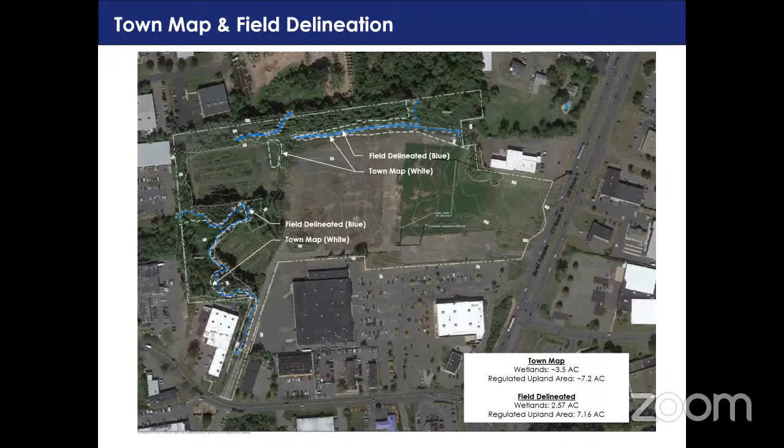Are we gonna take a roll? Excuse me, are we gonna take a roll, Ms. Gibbons? Yes. All right, please proceed. Commissioner Ancona? Here. Commissioner Bashan? Yes. It's a yes or no. Back to Mr. Ancona. Commissioner Ancona, yes or no? I didn't hear you. Well, I'm sorry, yes. Commissioner Bashan? Yes. Commissioner Casasanta? Yes. Commissioner Conway? Yes. Commissioner Paskowitz? Yes. Chairman Sadoo? Yes. Commissioner Wagner? Yes. 7 yes. Okay, thank you. You're welcome.

So moving on to public hearing B, application number 2021-11 for construction activities in the inland wetland and watercourse regulated area at 3333 Berlin Turnpike. Applicant HJG-PC Newington Investor LLC, owner the Rocky Road Realty Company, agent contact BL Companies. I will ask the applicant if they have another presentation for the public. Yes, we do, Mr. Chairman. Please proceed. Thank you very much.

Again, for the record, my name is Chris Smith, and I appear before the commission representing the applicant concerning this application, which is the subject of the second public hearing. And this application involves a request for permission to conduct certain regulated activities associated with a mixed-use residential and commercial development of the subject real property known as 3333 Berlin Turnpike.

And Mr. Chairman, if I may, I'll just quickly go through. We have a similar intro, obviously, that we covered with the prior public hearing, but the public hearings are separate unless we incorporate certain segments. So I'll just briefly go through some of the same information that we did with the prior public hearing. Please proceed. So again, the applicant comprises two different entities. The first is Grossman Development Group. And on behalf of the Grossman Development Group, we have with us this evening Mr. Howard Grossman, who is the president and managing principal.

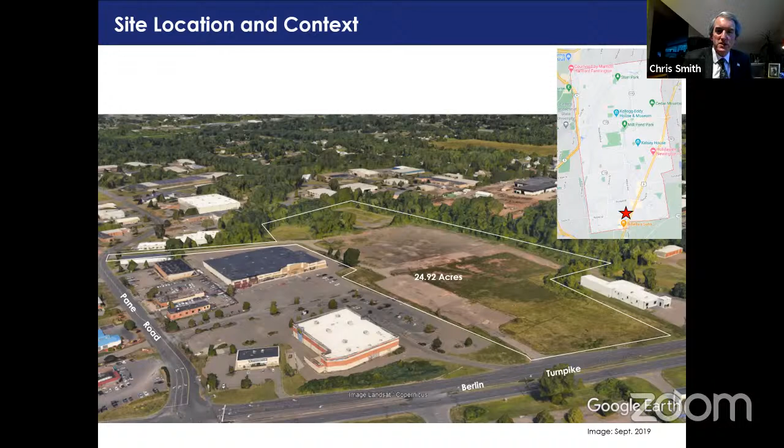The subject property, again, is 3333 Berlin Turnpike. You can see the locational map on this slide. There's a locational map in the top right-hand corner with the site located in the bottom southerly side of the locational map. On the easterly side of the property, we have the Berlin Turnpike, and in the southerly side, we do have access from Pane Road to the subject property.

Now, if I can have the next slide, Mr. Chairman, if we may, Mr. Davison can walk through the same presentation, or if within your discretion in the commission, if you wanted to incorporate that portion from the prior public hearing, just dealing with the wetlands identification and description, we can have that incorporated. So I will waive that at this time. Please proceed to your next slide. So you would like Mr. Davison just to provide a quick summary? Please. Okay, thank you, Mr. Chairman. So with your permission, I'll turn the presentation over to Mr. Davison, and he'll provide a summary of his description of the various wetland resources and watercourse resources associated with the property.

And then, just to provide you with an overview, we'll turn the presentation over to representatives from the BL companies who will walk through the specific site development relative to the regulated activities that are being requested to be approved this evening as part of this application. As the commission's well aware, the commission's not being asked to approve the actual site development. That's the subject of a separate hearing involving special permits with your Planning and Zoning Commission. But what's involved here this evening are the regulated activities associated with that site development. So having said that, I'll turn it over to Mr. Davison, and then we'll hear from representatives of the BL company. Thank you, Mr. Chairman. Thank you.

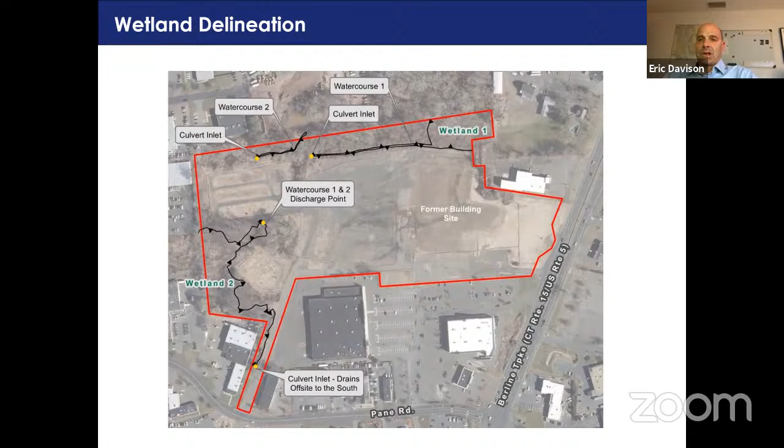I don't know, Mr. Chairman, just having gone through some of this before, I don't want to be too brief, but I don't want to waste too much of your time. So I don't know if you want me to go through. If I'm okay, we've seen this. I think I'm willing to proceed beyond, I'll go with your earlier testimony, and I'm willing to step through these slides fairly briskly. Obviously, these are photos. Perhaps I could jump ahead to the photos, and this would answer, I'm sorry, I don't remember the commissioner's name, but it was a great question. Just trying to relate the photos to where there are wetland activities. I can do that quickly if you want me to. Please.

Let me just scroll back to the, okay. So essentially all of the wetland impact areas are in the watercourses. The only wetland impacts are associated with just modifying the stormwater outlets. So the bulk of the impacts are really associated with the watercourses. And this is a major location here. This photo shows watercourse 1. This is at this point west of wetland 1.

And as you can see, it's sort of tough to tell, but for those of you that went out on the site, it was probably pretty clear to you that this is just, again, a big constructed drainage ditch. You can see the riprap on the far slope, the riprap on the base of the channel, and the riprap in the foreground on the slope closest to where I'm taking the photo. There's a lot of vegetation that's grown in, but you can see it's just a constructed channel. You can see there's no flow in it at this point.

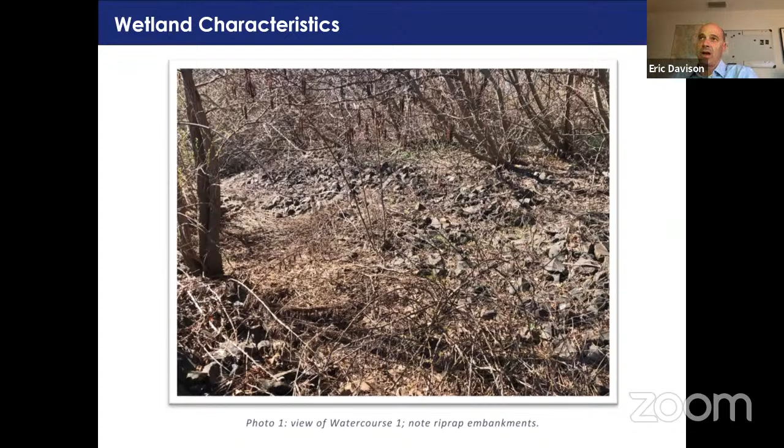If you want to go to... But just to be clear, yeah. Mr. Davison, however, the conduit will be beneath the ground. Obviously, we're going to cover it over, but the actual hydrology, if there's a very heavy storm, the water will be flowing underneath the parking lot over to the west. Correct. And meeting up with that other watercourse that's off the property.

Yeah, I was going to bring that up too, that when he said filled in, that might have been confusing. It's going to be buried, but it's still going to be there. Yes. And I'll let the engineer, let me just give you the orientation, but obviously the engineers can describe the flow conveyance features and stormwater features. But yes, sorry, poor choice of words. Yes, it will be piped. The watercourse will then be piped as opposed to open.

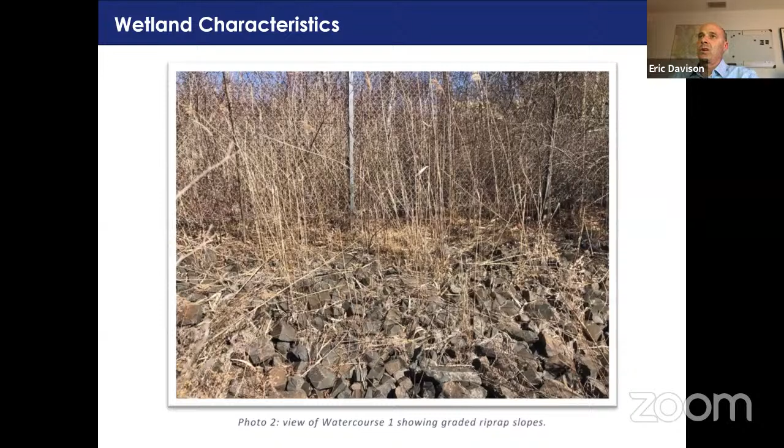This photo is just showing the origin of watercourse 1 at the southern base of wetland 1. This is about where the limits of disturbance begin. This is just at the southern edge of wetland 1, right where the watercourse starts. That riprap that you see in the photo, that is the far slope or the northern slope of watercourse 1. And then if you guys want to flip ahead to watercourse 2, keep going. You keep going.

Okay, so this is watercourse 2. This is another section that will be impacted. This is the watercourse again that flows from the offsite detention pond. It flows onto the site where it elbows and turns to the west. At that point, that's where the parking is going to end. So the parking will cover this watercourse, and again, it will be piped.

This watercourse is already piped, so it'll basically just be extending the piping, well, I'll let the engineers weigh in, but it's basically just a short extension of the piping to accommodate the northern end of what's going to be parking. But this is the other channel that will be filled in. Again, this is not a wetland, it's simply just a watercourse. It's just a flow conveyance feature. It's got riprap in it, it's got manipulated earth, it's mostly invasive species. There's no real significance or function to it other than just carrying flow into a pipe.

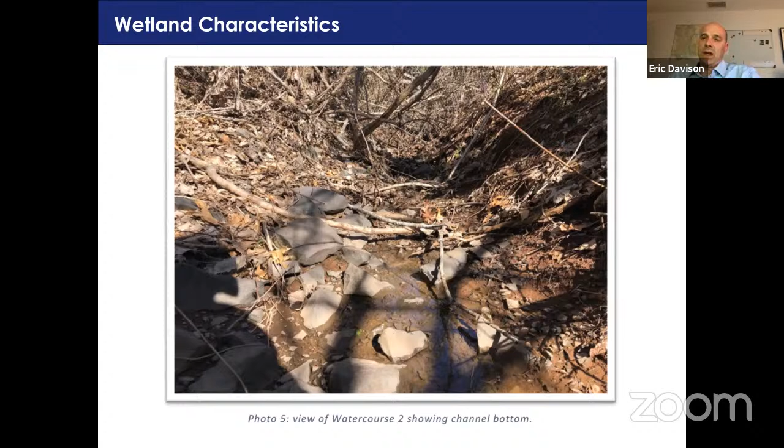So those are the photos that show the two areas that will have direct impact. The other photos that I showed of this wetland here, wetland 2, these are all areas that are outside of any direct impact. So hopefully that answers the question the other commissioner had asked about photos relative to impact areas. Those are the only areas that will be directly affected. Yes, it did answer my question. Thank you very much. You're welcome.

I have a question. That open area on the left-hand side, I assume that's the area where there's going to be the stormwater management area on the plan? Correct. That's an open field now. That was one of the Eversource equipment staging areas and training areas for their arborists when I originally flagged the site. So that's an open area that's already been disturbed and manipulated. There's some gravel and some grass, and it's an open field.

I'm sorry, Mr. Chairman, didn't mean to interrupt you. It looks like there's some kind of a swale or a little detention basin there now. Is that correct? No, those are just mowed trails, like mowed lines in there. I think what you're seeing is some fencing around the outside. I stood on the road there and looked in, and it looked like it was a depressed area. So I thought it was intentional, but maybe it's just the appearance of it. Yeah, there's no stormwater feature there now. Okay.

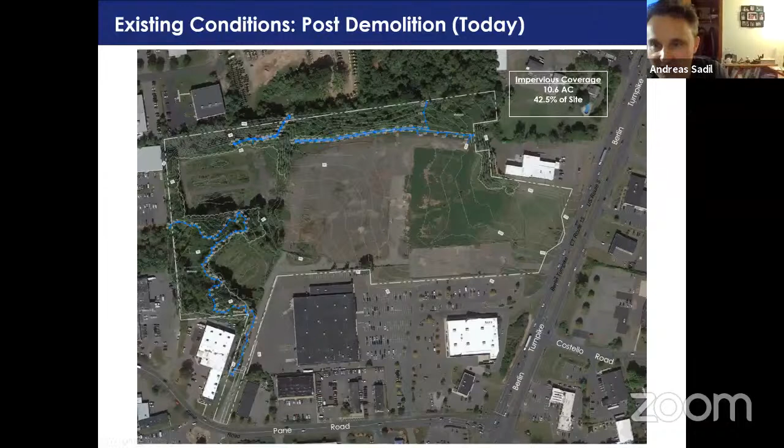Thank you, Mr. Chairman. For the record, Dennis Goderre with BL Companies, Senior Project Manager. I'm a licensed landscape architect here in the state of Connecticut. I'm also a planner certified by the American Institute of Certified Planners.

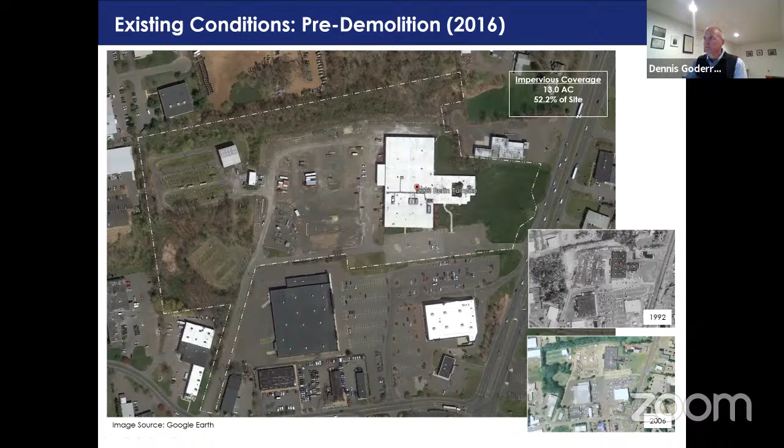At the time, just over half of the property was considered basically impervious. A fair amount was also not just paved or building, but was gravel, which is very comparable to asphalt pavement, especially after it has been compacted with vehicle movements. After demolition, just below half, 42%, remains today as nearly impervious with the buildings removed. So as you are aware, it is a highly disturbed site.

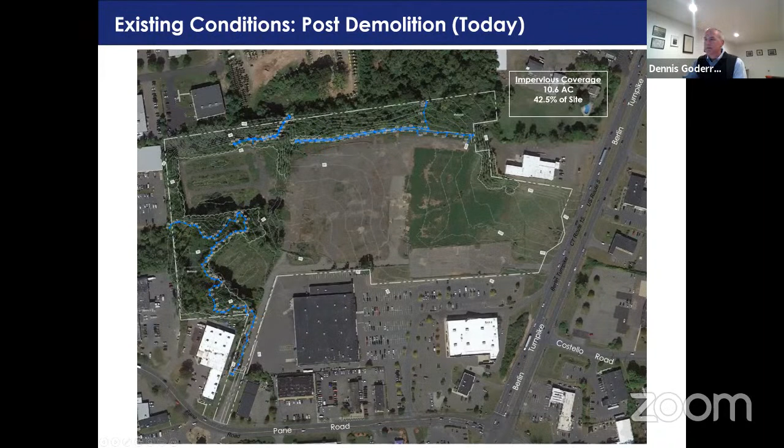I'm going to just provide a brief overview of the project itself, and then I'll turn it over to Ms. Carlson to talk in more detail about the stormwater management and other technical aspects. As was previously mentioned by Attorney Smith, the site is just about 25 acres. It is proposed to be subdivided to accommodate a residential development on the western half of the property and a commercial development on the eastern side. So it's roughly 13 acres and 11 acres to accommodate the two developments.

It's 269 residential units and just under 80,000 square feet of commercial space, a mix of different types of retail and commercial, with a supermarket as the anchor. Stormwater management is located in this location, which is above grade. There's some below grade subsurface, which Ms. Carlson will talk about in a moment. And supporting the development is parking to meet the requirements of the zoning. I know that zoning isn't your regulatory area, but it has an impact on the overall site layout.

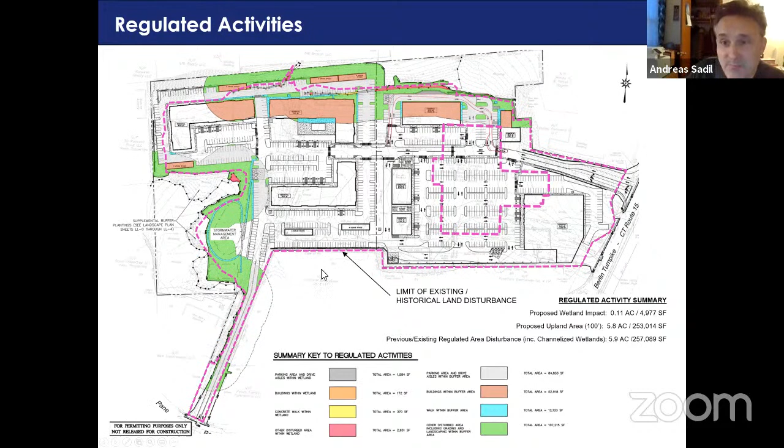Mr. Sadil? I have questions. A few. Yes. So as far as the site itself, are the wetlands going to be impacted by refuse receptacles? I mean, when you have a housing area, there will be people who have to dispose of their day-to-day trash; is that going to impact the wetland? Also, I'm concerned about snow removal. Is that stormwater area going to be vulnerable when you have to push the snow out of the way? And how has that been addressed?

The wetlands will in no way be impacted by those activities once the site is functional. Yes, the refuse area. So this is one refuse location that services the residential. There's another refuse location here, and then over here that services the retail and commercial. There is an operations and management plan that we have submitted that would require routine reviews and litter removal and pickup and inspections to ensure that the areas of refuse are enclosed and maintained. If any debris does in fact get blown in or find its way into the wetlands, it would be picked up as well.

Snow removal, there are areas such as this triangular location here. Some of these larger areas would also have locations for snow storage. Some of the runoff would find its way into the stormwater system, which would then have some level of treatment, which Ms. Carlson can speak about momentarily. Okay.

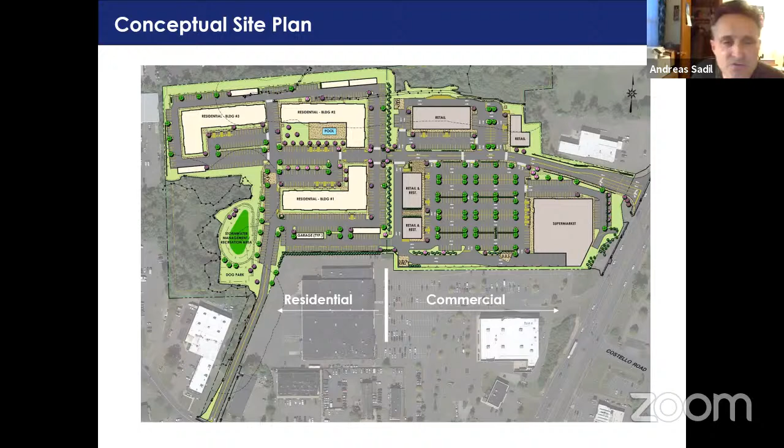I did have a question about the plantings adjacent to the wetlands. Who can tell us what plantings you're showing in your model there, hopefully no invasives of any kind? No, you read my mind. That was one of the slides I was getting ready to present. We are proposing, to the best of our ability, to remove any of the invasives that are there. We certainly would like to achieve removal of all of them. But then we would look to enhance the buffer area outside of the wetlands with new plantings. It hasn't been established really how many.

It would be more case by case, or based on field conditions as the development gets finalized, but native species such as red maples, cedar, winterberry, and dogwood, to name a few. They would be native. We would not by any imagination be proposing any types of invasive species to be introduced. That would not be in our proposal.

Thank you. If I may, Mr. Chairman. Commissioner Bashant. And to answer the question I believe the chairman raised about those most mature trees that we saw the pictures of, they will not be disturbed, I gather, by looking at this image here? Or will they be disturbed and then replanted with the trees that you're showing? In this location, the only area of wetlands that would be disturbed is right up in here, which is already disturbed from riprap and discharge from the existing stormwater conduits that discharge at this point. All of the other mature vegetation within the wetlands would not be disturbed. So there's no activity in there at all, basically? No. Okay, thank you.

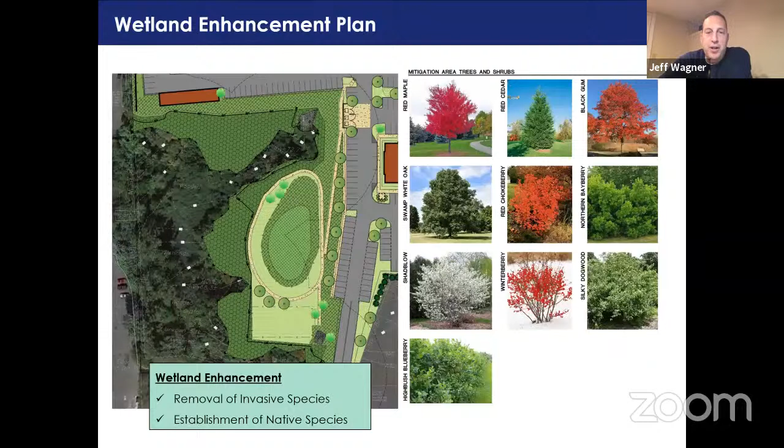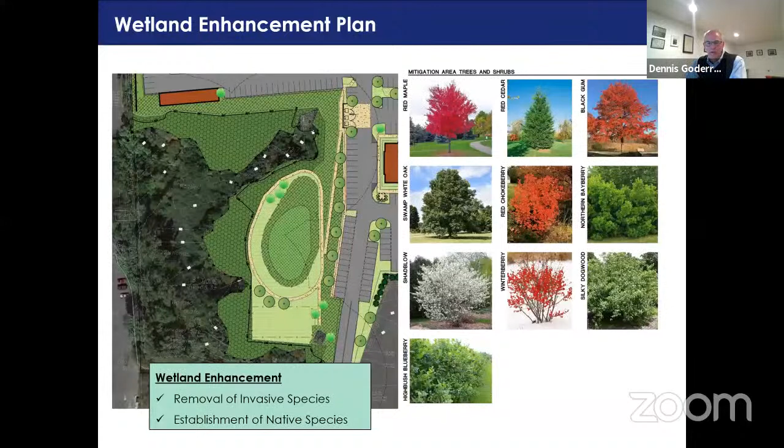Commissioner Wagner, I have a question. Commissioner Wagner. Are the parking lots going to have storm drains, and where's that stormwater going to run off to? That is a great segue to the next part of our presentation. If you wouldn't mind, we could certainly continue, and Ms. Carlson can give an overview of our stormwater management plan. Beautiful. Thank you.

Good evening. My name is Michelle Carlson. I'm a licensed professional engineer in the state of Connecticut. I'm the director of land development at BL Companies, and I'll walk you through the stormwater system. First of all, the existing system has no water quality treatment. There are no controls in place. So the system that we're proposing is going to implement controls to treat water quality, flow, and volume.

The system's designed in conformance with the 2004 Connecticut DEEP Stormwater Manual and the 2000 Town of Newington Drainage Manual, and we've reduced flows through the 1, 2, 5, 10, 25, 50, and 100-year storms. I should say the rate of runoff. There's a reduction in the rate of runoff at each of our discharge points over what's going there now, and it's designed in accordance with all of the standards.

What we're gonna do is there's the different colors here, so you can see where we're collecting stormwater and where it's going. So we'll start from the east side by the Berlin Turnpike in the navy blue. The navy blue piping is collecting roof water from that first commercial building out front and the catch basins in the parking lot. And the catch basins, we're proposing deep sump catch basins with hoods. So the hoods will help trap any of the floatables that might get into the system.

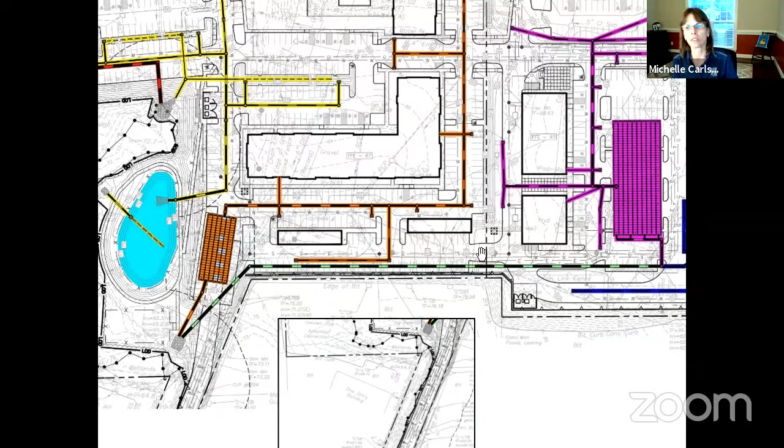No. Which I would imagine if there's going to be a problem, that would be a good problem. But too much of a good thing can be bad. Yeah, no, we are not increasing the rate of the flow. So there's nothing that's gonna come surging down into these outlets and cause erosion. We are decreasing the rate.

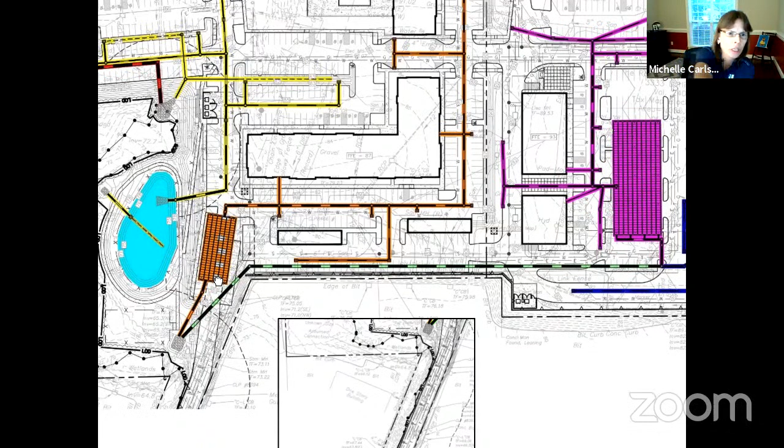Michelle, maybe you could speak to existing drainage on that area near the building, what was there and where it went, if you know. Sure, it basically went, Eric, to the middle of the pond. You can't see on the blue here. Yeah, it would go to there, and then there was another part, Dennis, that went right almost into the middle of the pond. Let me pull up the drawing, it might be easier. There's an 8-inch pipe that discharges over in this location.

Correct. That was my memory, is they did have a system down that existing driveway you can see on the aerial that went that way. So I think that might answer Commissioner Casasanta's questions, because the water did flow. They did have an existing drainage system.

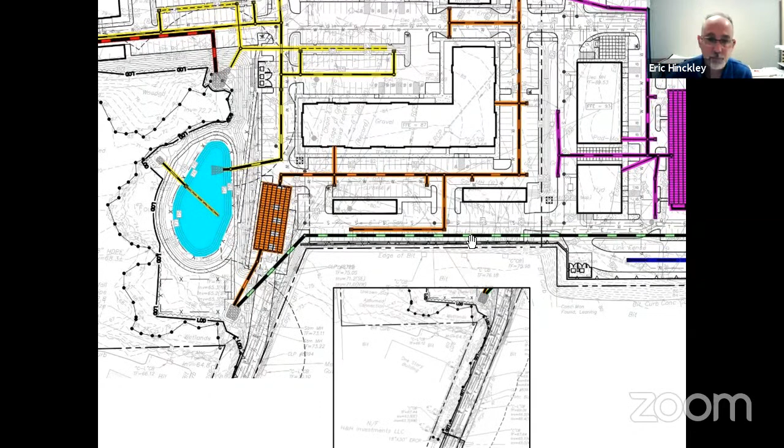Yeah, and for the record, again, Dennis Godere, BL Companies, even though the building had been demolished, all of the infrastructure is still in place. There's drainage structures here and conduit that's piping all the runoff currently discharging into this point or over to this point over here. Thank you.

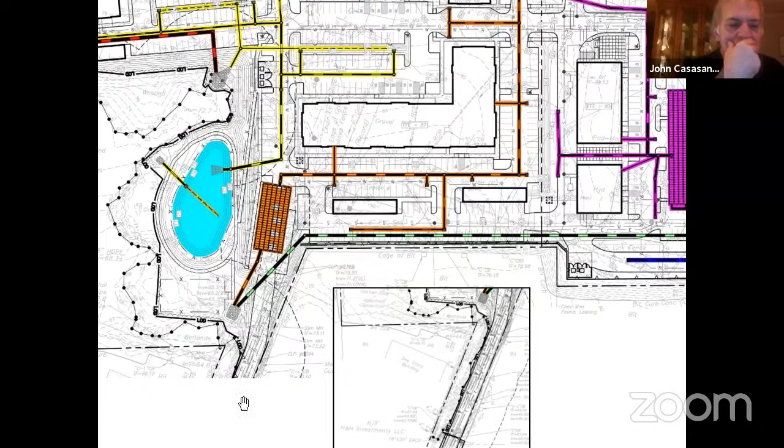So that stormwater management area, is there gonna be plantings in there, or is this gonna be an open pond where the ducks are gonna be? If I'm trying to envision this area, is that the way that area is gonna look when we're done? It's to drain dry. The intent is that we want it to drain dry. It's not designed to be a permanent pond. All right, are you gonna have some plantings in there? Obviously, with this wind blowing, something's gonna catch in there at some point, right? Especially invasives. Dennis, did you want to go over the plantings in the bottom there?

Yeah, as of now, there's a conservation seed mix that we had been proposing. That's part of what's in the buffer plantings. We can certainly enhance that with some of the native species that would be tolerant of wet and dry conditions. Yeah, it's not going to be a mud hole if that's what you're concerned about. No, it won't. That won't happen. Okay. But right, that would not be a welcoming view for the residential.

Okay. So relative to the wetland and the water that goes into the wetland hydrology, what type of maintenance is involved yearly, or what's planned? Obviously things go awry, things get clogged or sediment, and how does that work out so that the hydrology isn't impeded?

Well, we have the O&M that was submitted as part of the documents, and there'll be annual maintenance of the hydrodynamic separators. In the first year, you usually check the structures twice as much as you will in the subsequent years to get a handle on how much sediment is going in there. But the hydrodynamic separators, it's annual maintenance, regular sweeping as needed, trash pickup, quarterly checking of the catch basin sumps. And so there will be a regular maintenance program for the site.

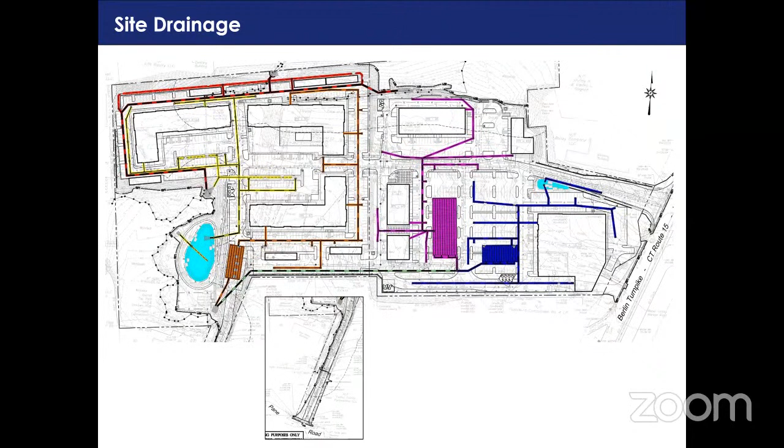Any other questions from commissioners? I don't see any hands up. See nothing from any of the attendees. Any questions for Ms. Conway? Commissioner Ancona, any comments? I have nothing. Thank you. All right, one last check from the public. Nothing that I see. All right, and at this time, I will thank the applicants and the presenters.

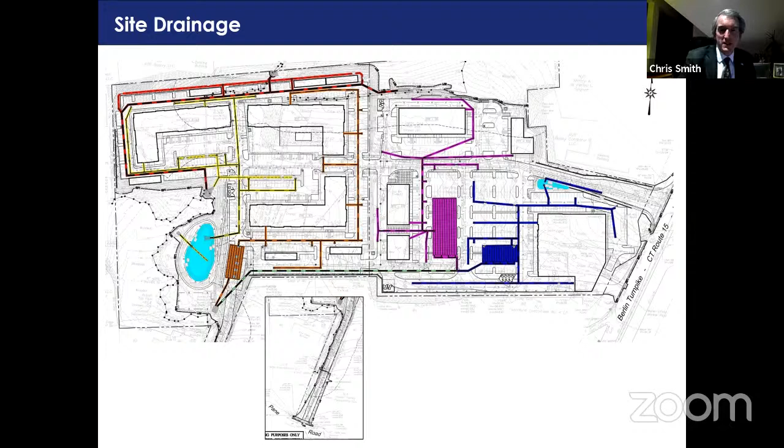Mr. Chairman, if I may, Attorney Smith. Mr. Chairman, we do have some slides that just summarize the E&S controls, but if you're satisfied with that, that is part of the application. I don't know if you'd like us to go through those, and then at the closing, I just have two questions for our 3 experts before we close out, with your permission. Please proceed, Attorney Smith. Okay. Good evening, Michelle Carlson again with BL Companies.

We have a phased approach to the erosion sedimentation control. The site basically will be balanced. We're going to have to move earth around, but the goal is to limit any hauling off of soil and to have it be a balanced site. And so what we've done is in the beginning we'll put 2 anti-tracking construction entrances, one on the Berlin Turnpike and one down on Payne Road.

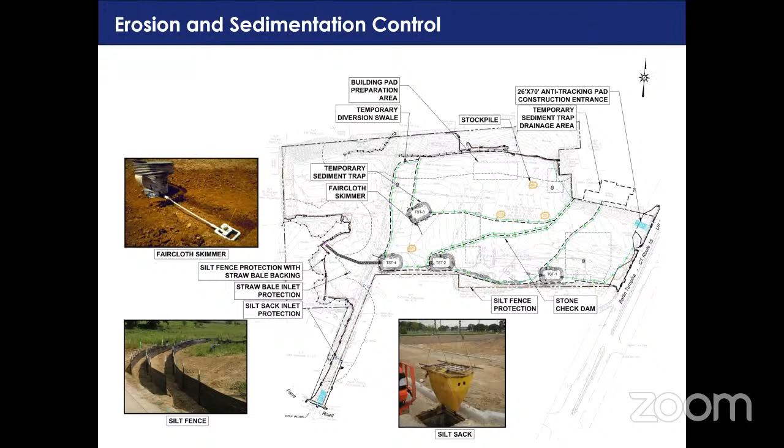And then as we start to put catch basins in, or before catch basins are pulled out, if there's existing ones there, we will protect them with silt sacks or hay bales and silt fence. So we'll make sure that all the existing structures are protected before we start grading. And then obviously they'll be taken out as we go along. So that's the first phase.

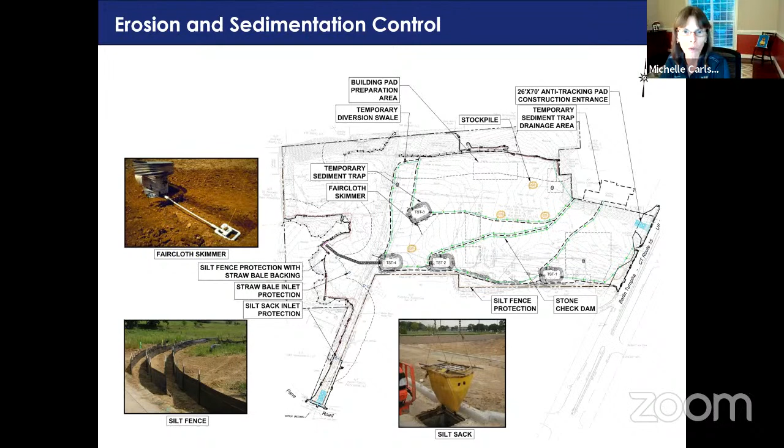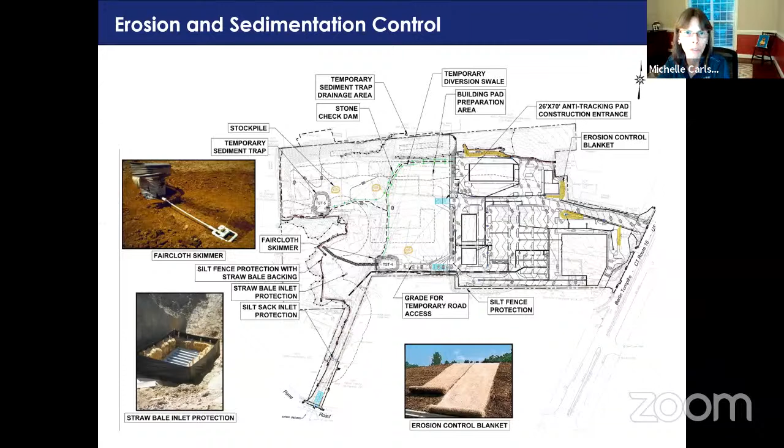Then there's a second phase. You can see now that we've started to get the retail set in, and we're putting erosion control blanket down to stabilize slopes. We still have our stone check dams and diversion swales running to trap 5 and trap 4, and we're showing some stockpile areas.

And then the next phase, we've worked into the residential area and we've added more erosion control blanket on the north side and down around the detention basin, and we're stabilizing the site. So that's it from a high level.

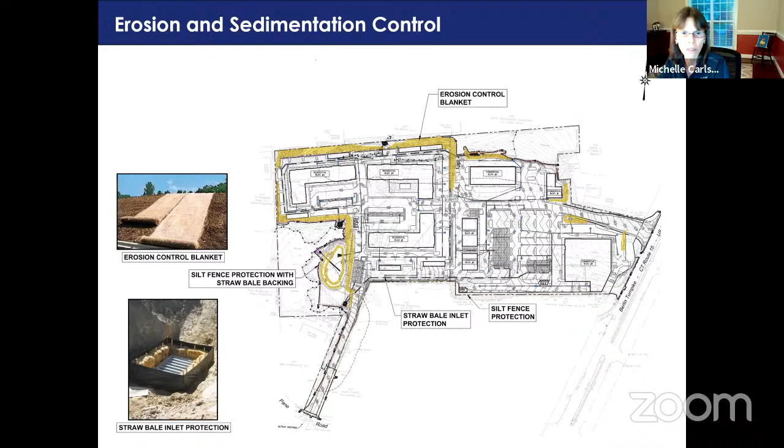Mr. Chairman, in our little conclusion and summary, just to cover all the bases for the commission, I do have a quick question for our 3 experts, if I may. I'm asking Mr. Davison as a professional soil scientist, professional wetland scientist, and Ms. Carlson as a licensed professional engineer, and Mr. Godier as a professional landscape architect.

If in your professional opinions and your expertise, the regulated activities associated with this application satisfy the factors for consideration provided by Section 22a-41 of the Connecticut General Statutes, as well as Section 10 of the regulations of the Conservation Commission of the town of Newington. And if you could just respond to that and identify yourself, that would be great. Thank you. So maybe Mr. Davison first.

Yeah. Hi, Eric Davison. Yes, it does, Chris, and also specifically to the wetland delineation methodology, it complies with everything in Section 22a regarding wetland delineation and watercourse determinations. Okay, thank you. Ms. Carlson? Yes, I agree that it satisfies both sections as designed. Thank you. And Mr. Godier? Dennis Godier for the record. Yes, I concur. Okay, thank you.

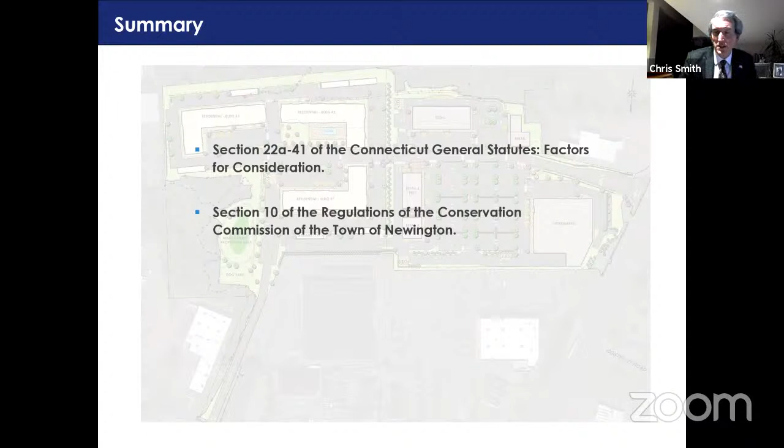Okay. Thank you, sir. Thank you to the team. Very good presentation. I'm impressed. Mr. Hinckley, is there anyone on the phone? Again, one last check on the public. I do not see anybody with their hand up. Are there any final questions from the commissioners? I'm seeing none.

In that case, may I have a motion to close the public hearing for application 2021-11. I make a motion. Commissioner Casasanta. Thank you, Mr. Chairman. I make a motion that we close the public hearing for this application. I'll second it. John Bashant. Second by Commissioner Bashant. Shall we call the roll, please, Ms. Gibbons?

Commissioner Ancona, yes. Commissioner Bashant, yes. Commissioner Casasanta, yes. Commissioner Conway, yes. Commissioner Paskowitz. Chairman Saydil, I'm a yes. Commissioner Wagner, yes. Commissioner Paskowitz. Yes. 7 yes. All right, thank you.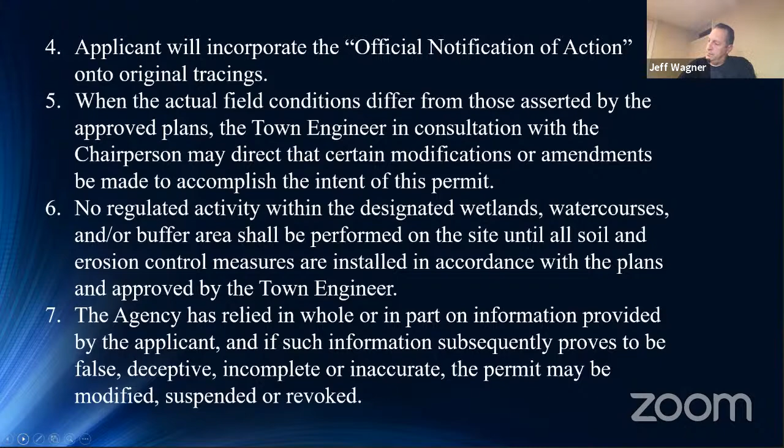Ms. Gibbons, please call the roll. Commissioner Ancona, yes. Commissioner Bashan, yes. Commissioner Casasanta, yes. Commissioner Conway. Commissioner Paskowitz, yes. Chairman Saydel, yes. Commissioner Wagner, yes. Commissioner Conway. Yes. Thank you. 7 yes. All right, thank you very much. Motion passes.

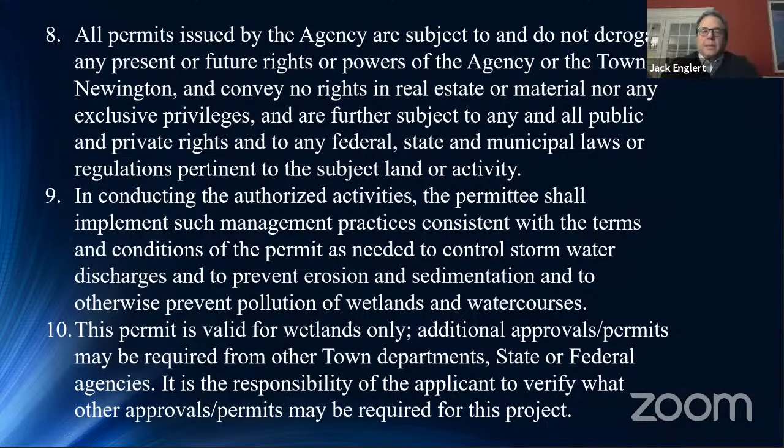Good luck to you all. Thank you. Have a good night. Good night. All right. May I have a motion to adjourn? Oh, we don't go through the other regular things since this was a special meeting. That is correct. We'll do that next week. Yes, we'll do it on Tuesday when I see you again, John. Okay. All right, I'll make the motion to adjourn. Moved by Commissioner Bashan, seconded by Commissioner Wagner. All in favor?